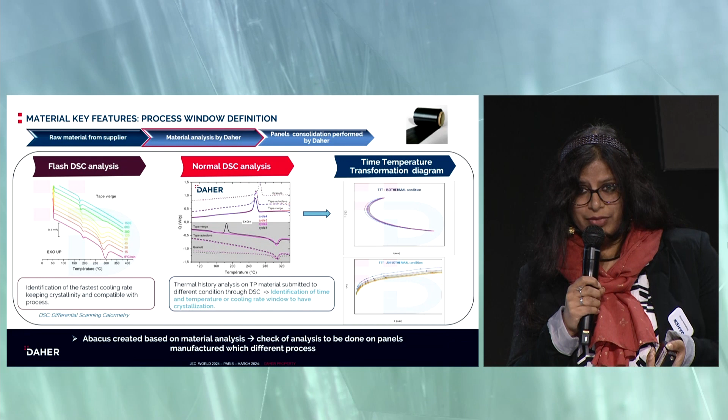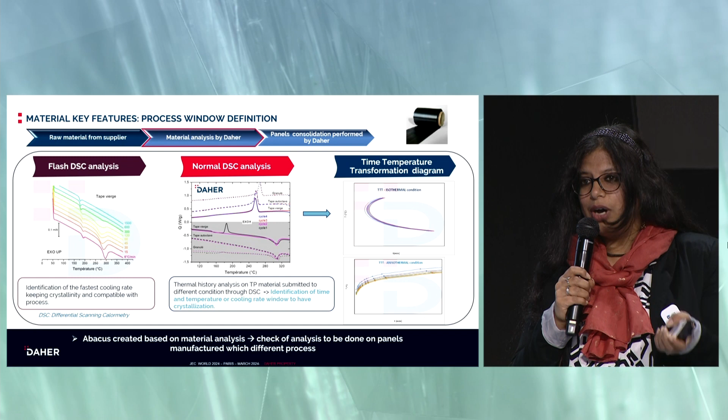We have also done DSC on the part for different times and temperatures, which helps us to have a time temperature transformation diagram. It's commonly used for metals to know the microstructure depending on time, temperature and cooling. We have taken this aspect and the polymer fundamental analysis to get this kind of curve. With this curve, we know where crystallinity occurs and where it does not, taking into account an isothermal and a non-isothermal analysis. With this abacus, we know how we can then process the material.

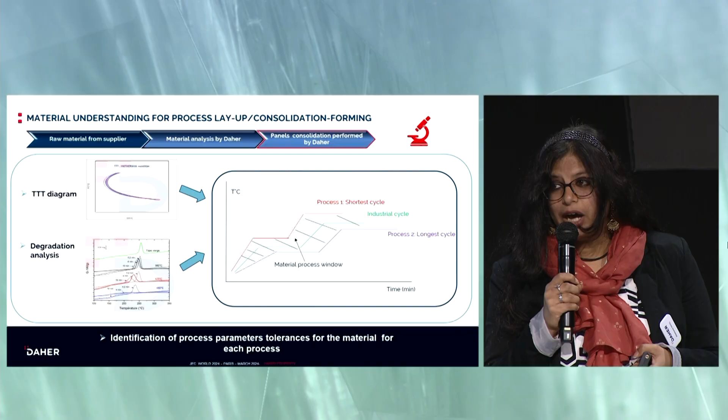We have the TTT diagram, and we have also done DSC analysis at high temperature, at different temperatures and times, to see if there is any degradation of the material. You can see the shift of the peak down on the picture, which means there is degradation of the material. So if we understand the TTT diagram and when there is degradation, we can have a process window for the material and parts that we can give to the manufacturer, to have the parts correctly done with serial production in control.

Let's have an overview of the environmental exposure of the material. We have put consolidated material at different temperatures and times, and checked for any mass loss, chemistry change, flexural change, or TG change. We gathered all this data and built a model which helps us to understand, according to the thickness of the material, the time and temperature where there is no degradation of the material.

So for example, whatever the thickness is, we know that the material can be used near 150 degrees Celsius. If we want to go higher, at 180 or 200 degrees Celsius, we have to take into account the thickness, the time, and the temperature. But we have all these abacuses done today in air.

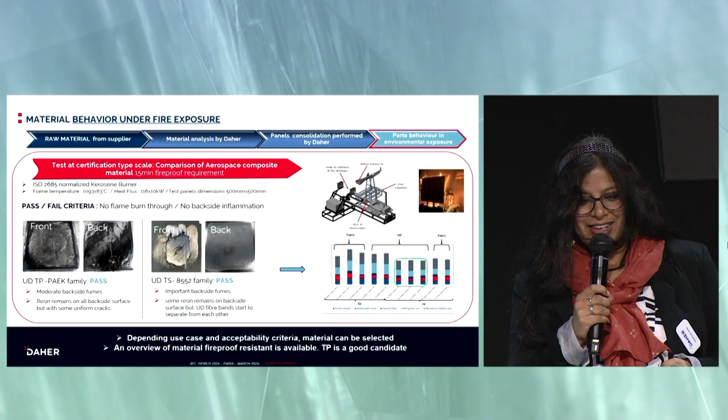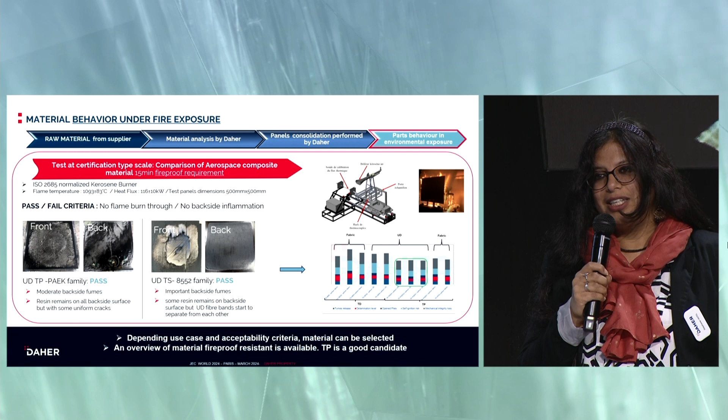Another point to take into account when we are doing some aircraft analysis is the fireproofness of our part. So for that, we have done a database of the materials we have for thermoset and thermoplastic, with UD and with fabric. And with the fireproofness, we can see if there is perforation, delamination, and any other defect during the fire test.

So here you have the information about the UD PAEK, and also a thermoset material. Both materials have passed the test, because we are comparing panels of similar thickness. And we have a database to know which material is appropriate according to the criteria we would like to have in fire.

Now I have explained some of the tests that we have done in fundamental analysis. Here you have just 4 slides, but it takes a lot of time to do that, and we have more. And do not hesitate to ask me some questions afterward.

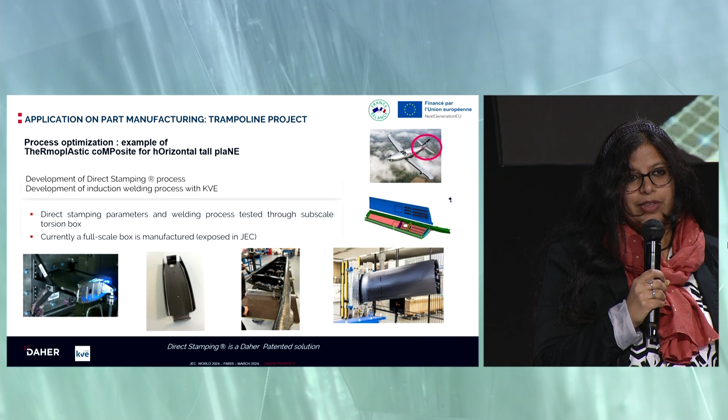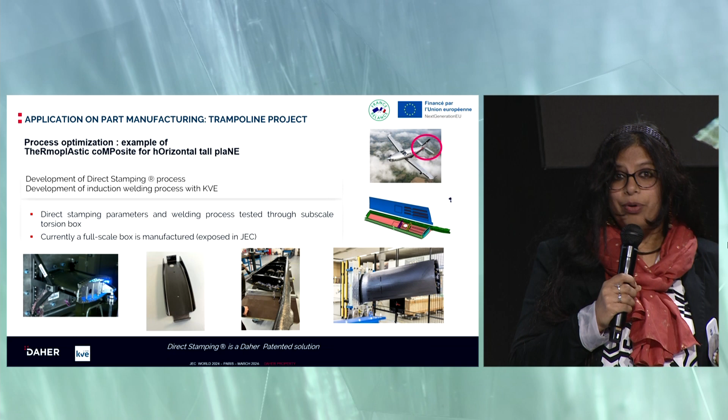So for the application, taking that into account, we have the trampoline project. So as I told you, we have our TBM. The TBM can help us to have a case study application of our process and material to understand if it's working or not. So for that, we have taken a horizontal tail plane that we have in the TBM. And with all the fundamental analysis I told you about, we have developed the direct stamping process by giving the process window to ensure that we can do a part with direct stamping.

And also, we help people to do induction welding to ensure that there is no degradation during the process. If you go to our booth at C32, you will see the full scale part that we have done, taking into account all these aspects. And last year we did a torsion box on which we have done some tests.

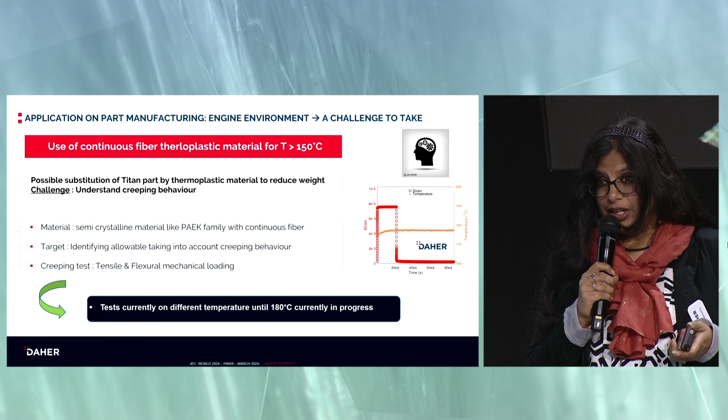Now there is another challenge. If we go to engine environments, it's to use the material above 150 degrees Celsius. So the basic question is, can we substitute titanium with thermoplastic to reduce weight? It's a big challenge because we have to take into account the creep behavior of the material. So for that, we are doing tests taking into account the creep of the material and defining allowables to take into account in our process, manufacturing and design. The tests are currently done at 180 degrees Celsius.

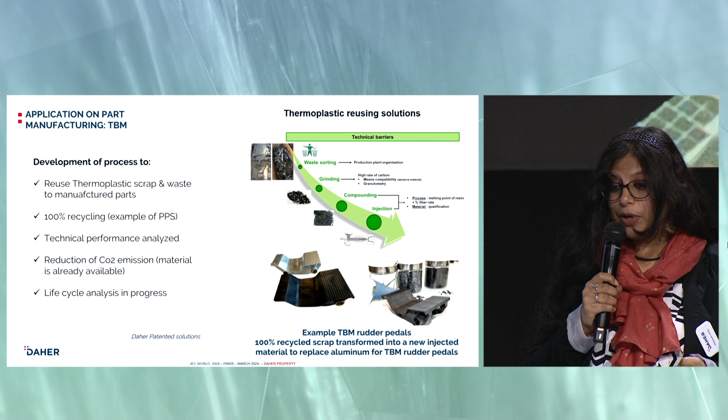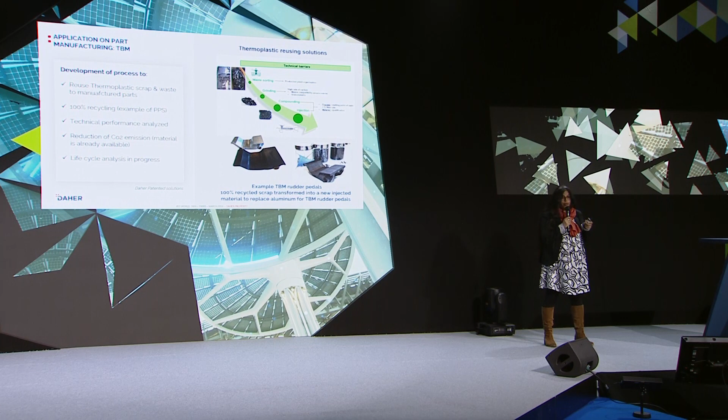And the last thing, which is also a benefit of thermoplastic, is the sustainability opportunity of the material. So at Daher we have developed a patented process, which consists in gathering all the waste of the material. Then we grind it, we do a compounding of all this material, and then we do the injection. You can also go to our booth and you will see our TBM rudder pedals, for which we have used 100% recycled scrap from inside our manufacturing plants.

By reusing the scrap, we also ensure the performance of the material, and we also reduce CO2 emissions because we do not have to melt the material. We just have to grind and compound it. We are currently doing some life cycle analysis at Daher.

So to conclude, I hope you followed what I have explained. It's important to have the fundamental analysis parameters on the thermoplastic material. It will help us to shape the process, the parts, and how to do the certification after that. So we have identified different kinds of parts that we can use. There is the pylon spar, where there are some challenging aspects with the thickness. There are some ribs, some air inlet frames, and some torsion boxes, as I have explained.

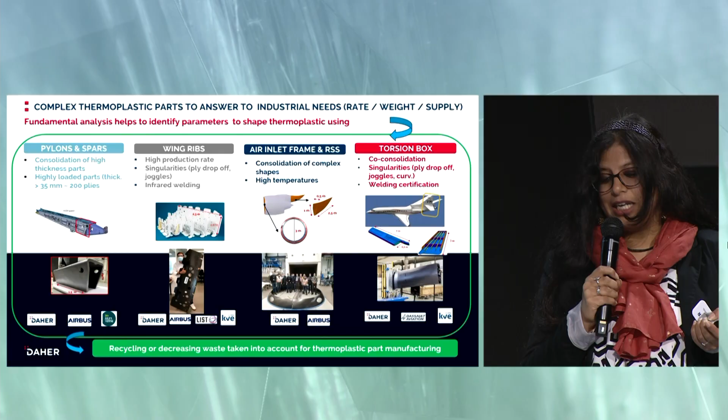And in aerospace, we know that weight is important to take into account, and it's a challenge that we are ready to take on. And in general, we also think in all of our developments about recyclability, to ensure that sustainability is taken into account for thermoplastic.

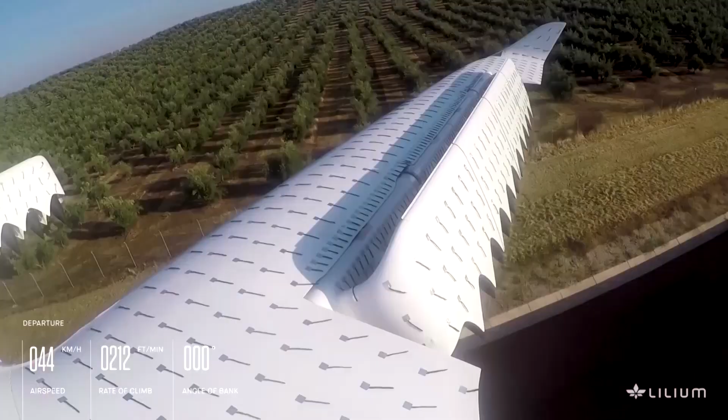So this was a flight back in September of 2022. And if you look closely as we go through, the flight envelope will increase to about 180 kilometers per hour. And if you take a note of the tassels that are attached to the wing, eventually you'll see a full airborne flight with the tassels being fully attached to the wing.

This is our Phoenix demonstrator. We basically started the production of that in 2019. We've had 3 generations of that. And then now we're focused on our,

I think there's something with the video here. So it's supposed to be a full flight from takeoff to landing. I think we'll get the final approach here.

But this is all electric powered vertical takeoff and landing capable aircraft that has been essentially our previous generation, and right now we're focused on our Pegasus program.

Very good, thank you. So as part of that effort, we're the first eVTOL company to have DOA approval by EASA to certify under the SC-VTOL category. And that's quite important for this industry in general because the type cert basis is quite new. It's something different and it's a new segment for aircraft.

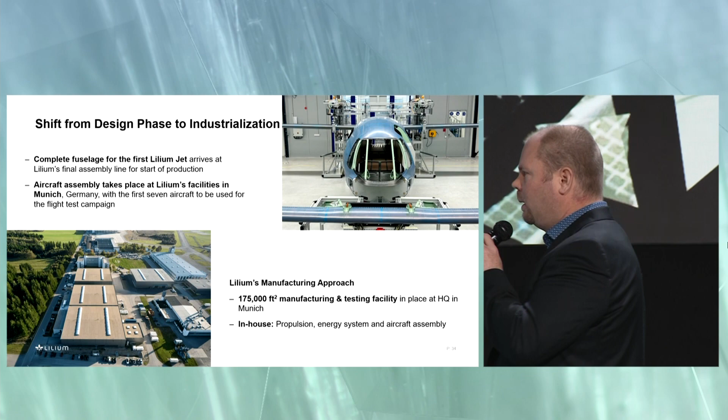Currently, we're actually building our first prototype aircraft for this flight test vehicle. We're located in Munich. Our production facility is fully capable for manufacturing and testing, and we're looking at expanding our certification in this effort.

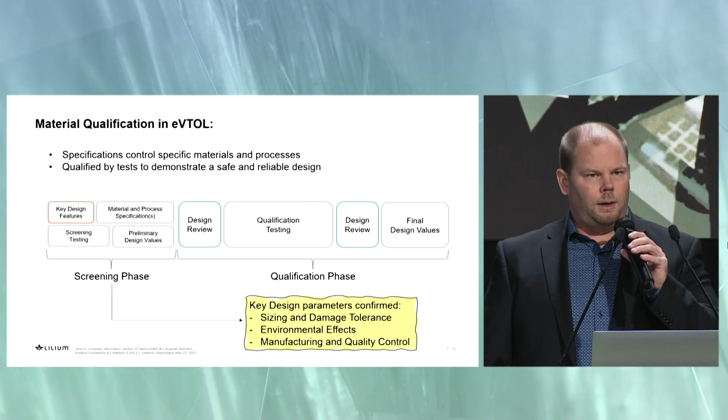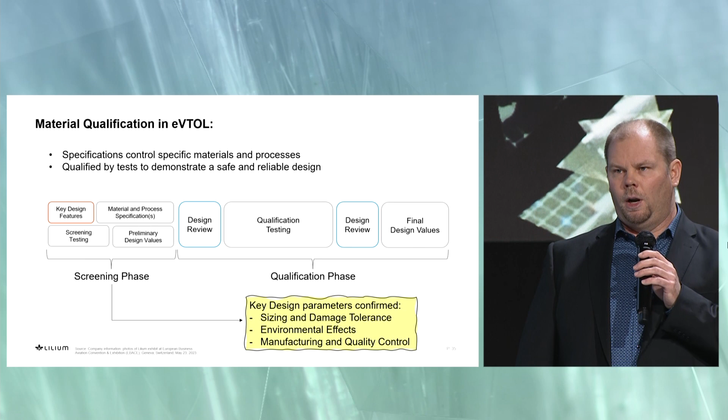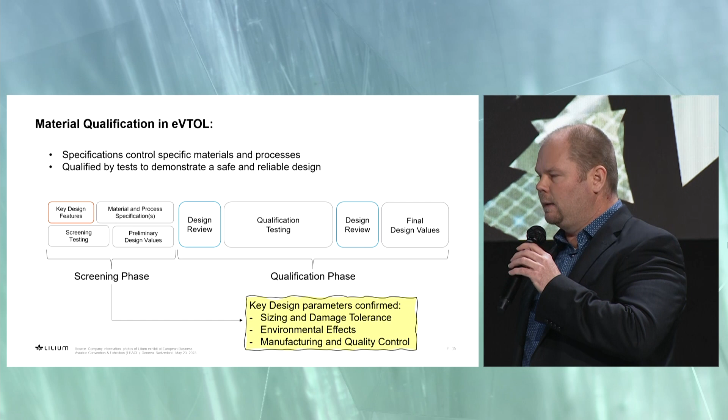Maybe I can take one moment and go beyond our initial discussion with material allowables, because this is something that is quite important, I think, not only for the industry in composites, but also for aerospace. And to understand where we're going, we have to first have a very detailed acknowledgement of what it takes for certification for materials. First, we have to understand what the design requirements are, looking at different design parameters for sizing, for damage tolerance, environmental effects, and looking at process and material controls. This is something that is fundamental to the aerospace design process.

And I think as you look at the number of eVTOL companies that are on board now, from a couple dozen before to now many hundreds, you're looking at the ability to pool resources and require a number of different test campaigns across multiple companies. So we take a step here looking at the building block approach that's used in aerospace. And you start with material campaign allowables, looking at characteristics that are required for tension, compression, the standard material processes, and that has to be repeated up through a detailed test campaign to eventually get to an aircraft level test campaign.

The opportunity here is, I think, just to expand on the public databases related to not only the generation of material properties, but also looking at the opportunity for processes and standardization of those processes along with testing. There's a lot of redundant work done across multiple companies, and if you look at the current landscape of commercial aviation, that might be acceptable for a few aircraft companies, but if you look at the emerging number of aircraft companies out there right now, it's very taxing, and it has a lot of detrimental effect related to cost, time, and most importantly, program development as it's related to producing new aircraft and novel designs.

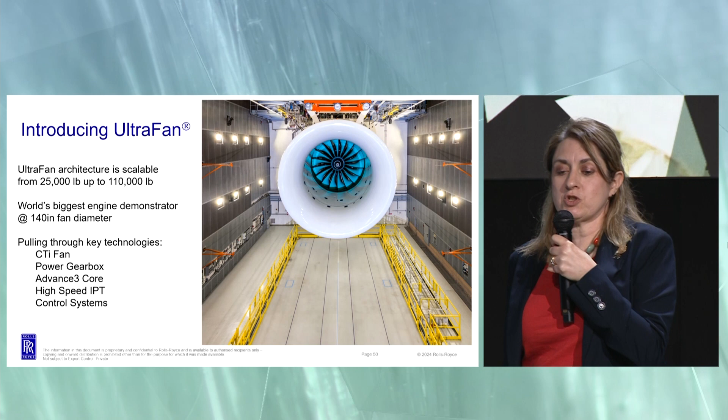So it's our world's biggest engine demonstrator with a 140-inch fan diameter, that's about 3 meters 40. And to put that into context, that diameter is large enough to drive a London underground train through the center of it. So we're talking about quite a big beast. And what we've been able to do here is pull together lots of new technologies; some of them we've been working on and will be deploying through our Trent fleet. Others are totally new for UltraFan.

In particular, there's a 64 megawatt power gearbox that sits just behind that fan, the purpose of which is to slow down the fan, which has allowed us to go to that large and efficient fan diameter without having supersonic tip speeds. We have a totally new core for the engine, which includes a lean burn combustor, and with that comes much lower NOx emissions. We've also incorporated a new high-speed intermediate pressure turbine, new control systems, and of course the thing that's of interest to everybody at JEC World is a new composite fan.

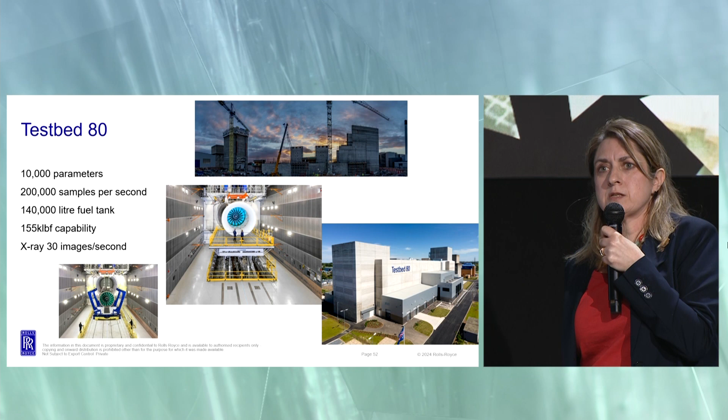So how do you test the world's largest demonstrator engine? Well, you end up having to build a totally new testbed. Testbed 80, which you can see under construction in the top image, is the world's largest and smartest testbed. The hall where you actually put the engine and do your testing is larger than a football pitch. And to build this, it required over 3,000 tons of steel and enough concrete to fill 11 Olympic-sized swimming pools.

It allows us to measure up to 10,000 parameters, and we can sample at a rate of 200,000 samples per second. It has enormous fuel tank capabilities underground, and one of those allowed us to test on SAF.

Other things to know about the facility are it's going to give us the ability to X-ray an entire engine at a rate of 30 times a second. The other images you see here are actually the UltraFan engine itself when it was initially installed into testbed 80. And you can see it sort of being put up onto the test stand.

And I think the thing, having stood in testbed 80, is suddenly once you see the engine in there, it no longer looks large. It sort of looks all in proportion. And I think this gives you an idea of how big the testbed is.

Okay, to move on a little bit to our composite manufacturing. We're making our composite fan blades and fan case at our composite technology facility, which is based in Bristol in the UK on a Rolls-Royce site. And we're making the fan blades by automated fiber placement, AFP.

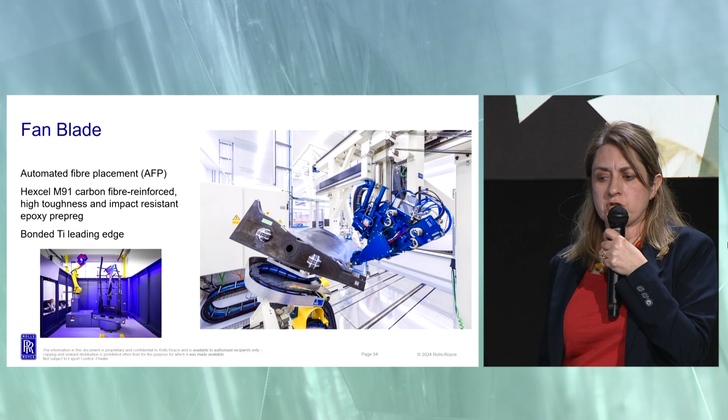And I think what you can see in the right-hand image is we're laying up quite a complex shape. There's quite a complex curvature to this fan blade. And to give you an idea of size, it comes up to about my chin when it's standing on its root. We're using a Hexcel M91 carbon fiber reinforced high toughness and impact resistant epoxy prepreg.

This is then autoclave cured, and following that we're fitting a titanium leading edge. That leading edge is there for erosion protection. It gives us protection against foreign object damage, and also gives us protection against bird strike in operation.

The composite technology facility that we have got is also stuffed full of all sorts of nice toys for NDT and metrology techniques. And what you see in the bottom left is an UltraFan blade sitting in the GOM metrology inspection cell.

Okay, so the fan case. I'm not actually going to talk much about the fan case today because all the testing we've been doing so far on UltraFan is on the blades. But what you see here in the left-hand image is automated tape laying of a small trial size case. We use this for impact validation testing. And what you see on the right-hand side is just to give you an idea of scale of an UltraFan fan case as it's being laid up.

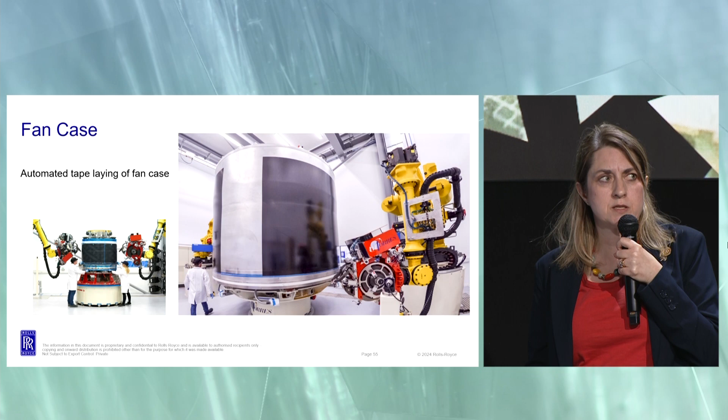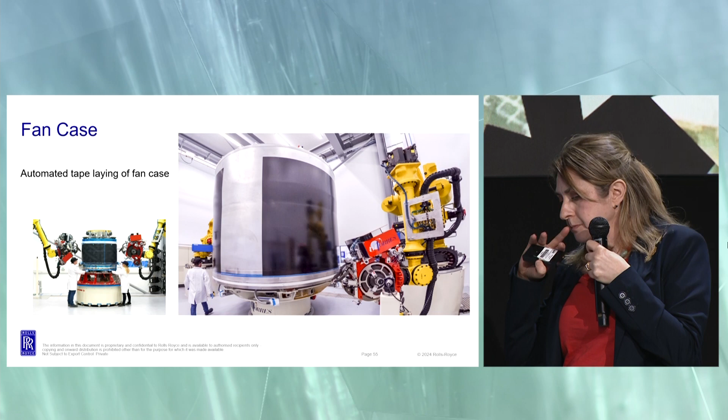Maybe worth pointing out that we've moved to composites for this primarily to reduce the weight of the fan system on UltraFan. Excuse me. By reducing the weight of the blade, there is a knock-on effect that we can actually also reduce the weight of the containment fan case.

And then you get subsequent knock-on effects. It allows us to take even more weight out of the engine. And then there's another knock-on effect where the airframer can also remove weight from the airframe by having a lighter fan on the engine.

Okay, to move back to the blades and have a quick look at some of the rig testing we've been doing over the last few months. Okay, a couple of slides the wrong way around. I apologize. Well, I'll show you here coming up.

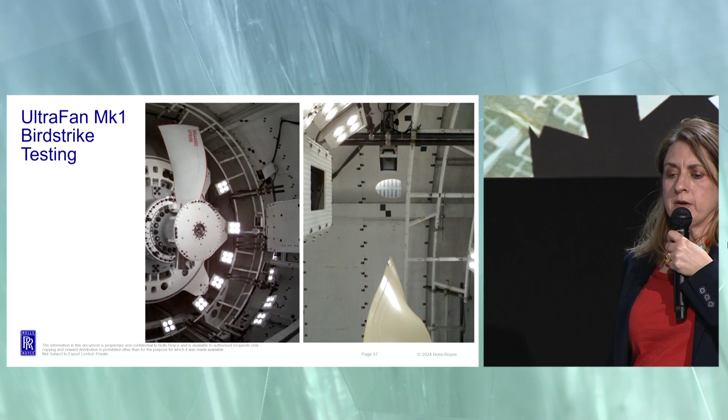So when we do single arm bird testing, we do this in order to look at a range of bird sizes that may impact the fan during takeoff or flight. And we do this to look within the certification requirements that are set by the authorities. So we look at a range of bird sizes, covering medium to large birds, large flocking birds.

And we do all our initial work using gelatin birds, and we spin a single blade in a holder in a vacuum vessel. The control we have over our bird launcher means that we can control the velocity, the trajectory, the very, very specific timing and the position in which we impact the blade.

And we're all the time recording this with high-speed imaging at 12,000 frames per second. We tend to have about 6 to 10 cameras, depending on the type of testing in there. And what I'm about to show you is a couple of videos.

This is from the same bird test, but just different angles. And what you will see is an UltraFan blade being impacted and what happens to the gelatin as it's sliced and breaks up on the test. So I will just run through these.